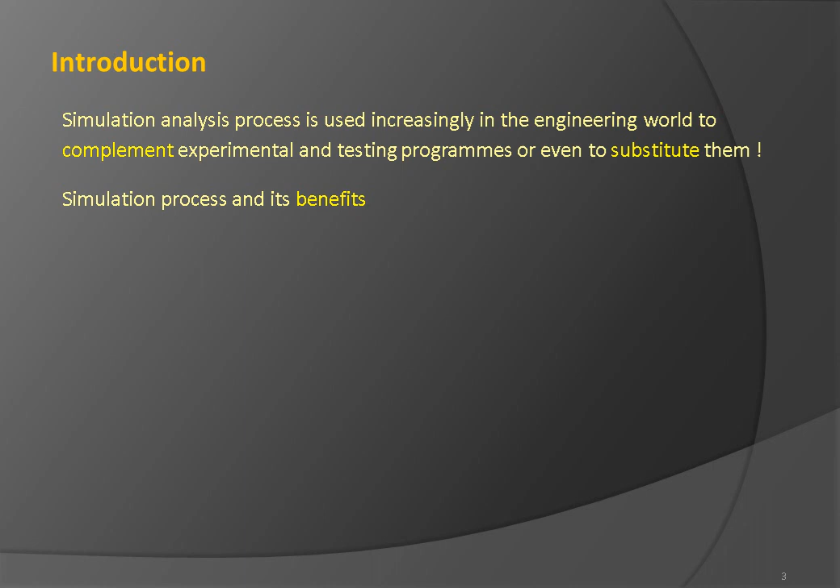It is worth starting the presentation with the following statement. Simulation analysis process is used increasingly in engineering world to complement experimental and testing programs or even to substitute them. The reasons for this are economic, as the simulation techniques offer greater flexibility in managing testing environment, faster turnaround time, more comprehensive post-processing options, and lower costs.

In some cases, safety considerations make physical testing impractical altogether. Such cases can be found in fire engineering, nuclear safety, and space equipment design, to name just a few. Therefore, an overall trend in engineering process can be recognized. Design by experiment or by test is being substituted with design by simulation.

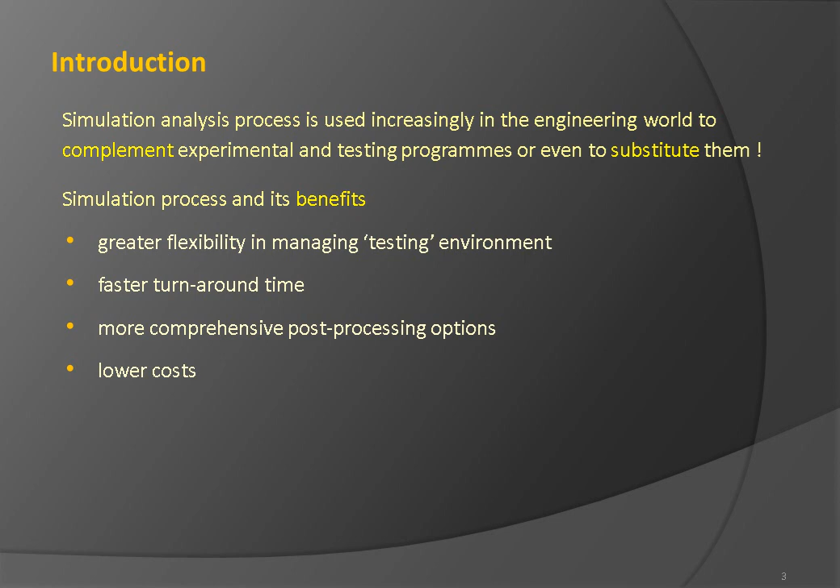In the world of numerical simulations, most of the effort is focused on recreating reality in a digital environment. Once the created virtual reality is representative of the analyzed environment, capturing relevant data is often much simpler than during physical testing. Initially, reality of interest has to be described using mathematical formalism. The question then arises, how well the mathematical abstraction corresponds to or confirms reality. Such a mathematical model has to be translated into a computer model that allows computational execution and simulation of defined real-world scenarios.

Verification activities are required to confirm that the computational implementation accurately represents the mathematical conceptual description. In addition, validation looks at the degree to which the computational model is an accurate representation of the real world from the perspective of the intended use of the model. These assessment activities shall be an integral part of the simulation quality assurance process. More on the subject will be said later.

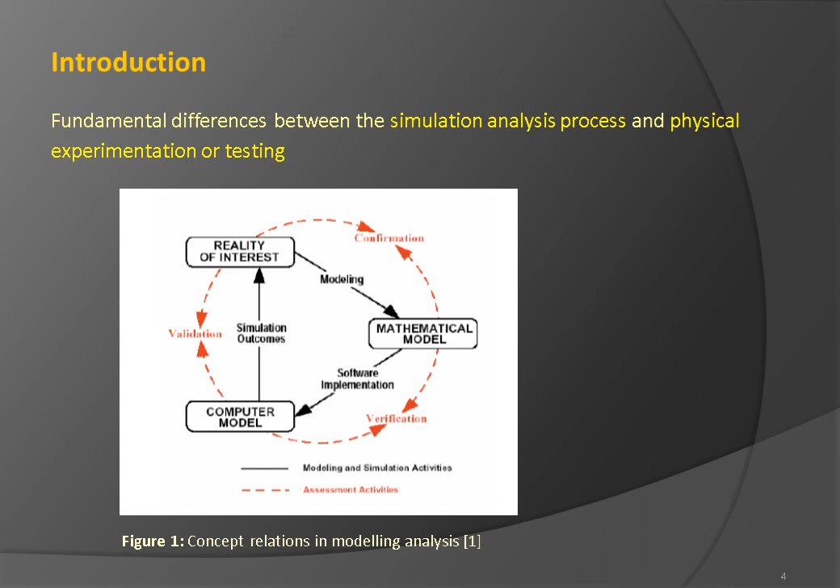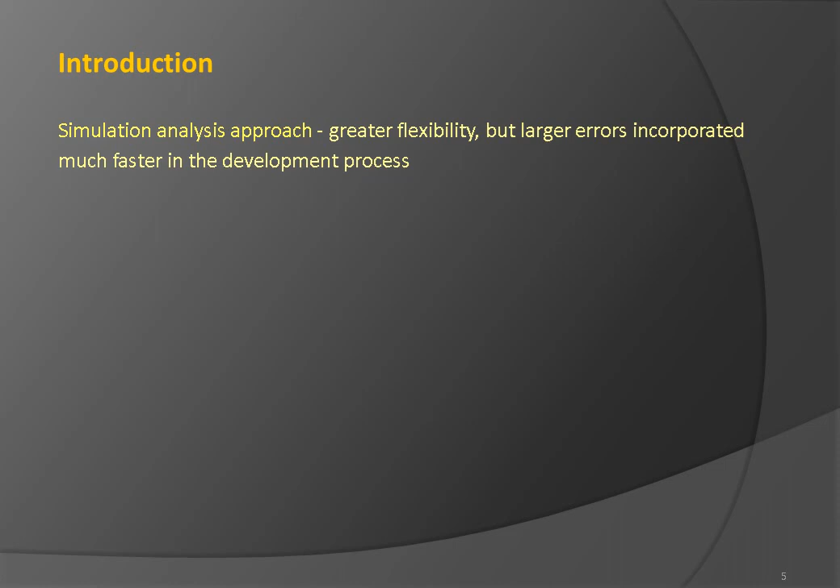Although the simulation analysis approach offers much greater flexibility, it also allows much larger errors to be incorporated in the development process much faster. To avoid mistakes and to mitigate their impact, as some of them will inevitably stay undetected, suitable quality assurance or QA processes need to be set up and implemented with full rigor.

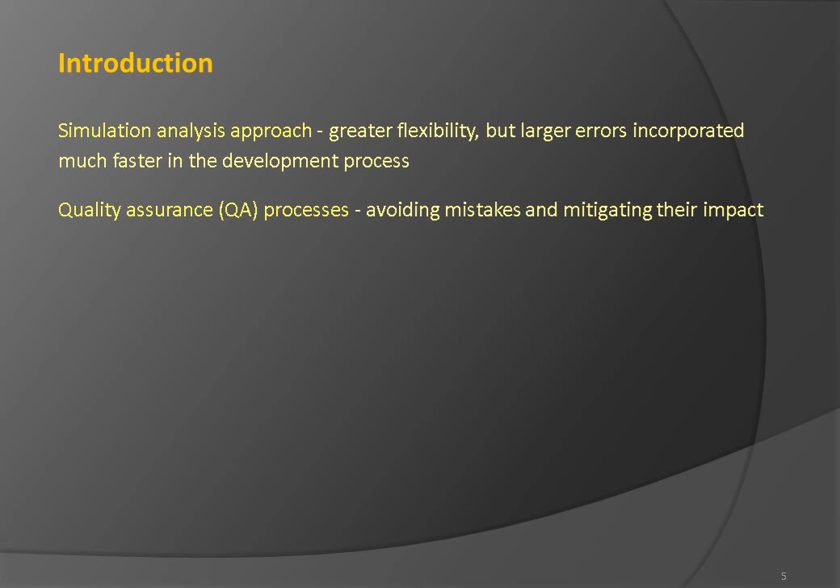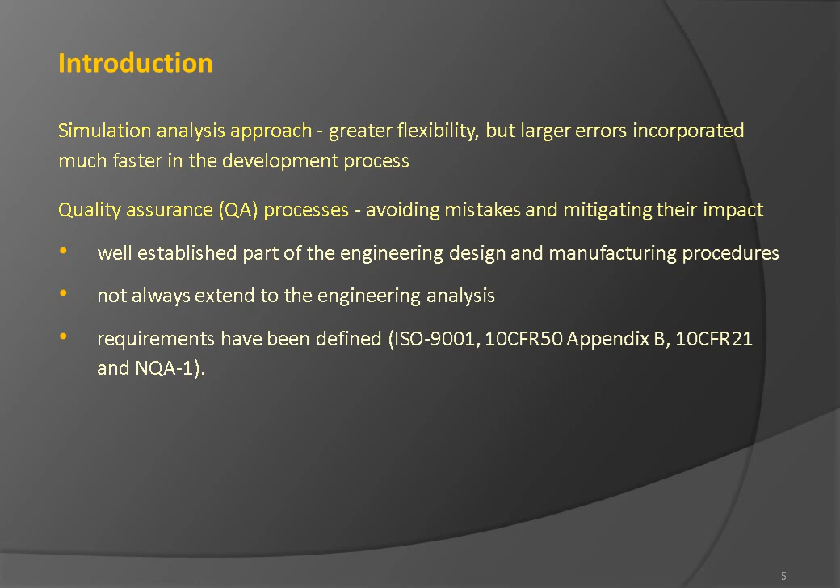Such QA processes are a well-established part of engineering design and manufacturing procedures, but they do not always extend to the engineering analysis, although the related requirements have been defined by ISO 9001, 10 CFR 50 Appendix B, 10 CFR 21, NQA-1, to name just a few.

It is important to emphasize that through all phases of the project work, the analysis objectives must be clearly defined and then agreed between all stakeholders. Such definitions shall be qualitative and quantitative as much as possible. This is especially true for the analysis output, its content as well as its form. It is recommended that clear separation between the design process and the analysis objectives is established.

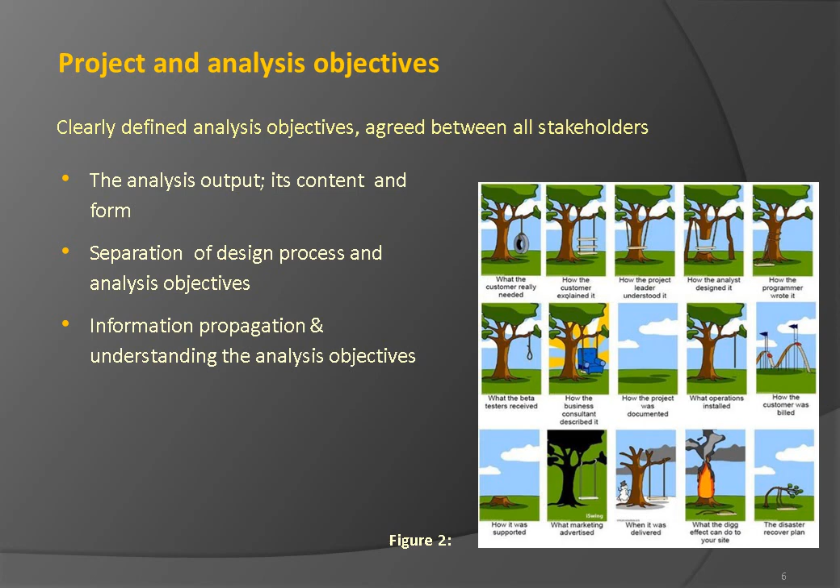The analysis objectives have to be propagated from the top to the bottom. Each analyst or engineer has to understand the objectives, that is, what has been sold to the client. On the right is a cartoon that too often illustrates my experience. Quality parameters, that is, modeling uncertainty, numerical errors, results variability, and sensitivity, shall be an integral part of the analysis objectives.

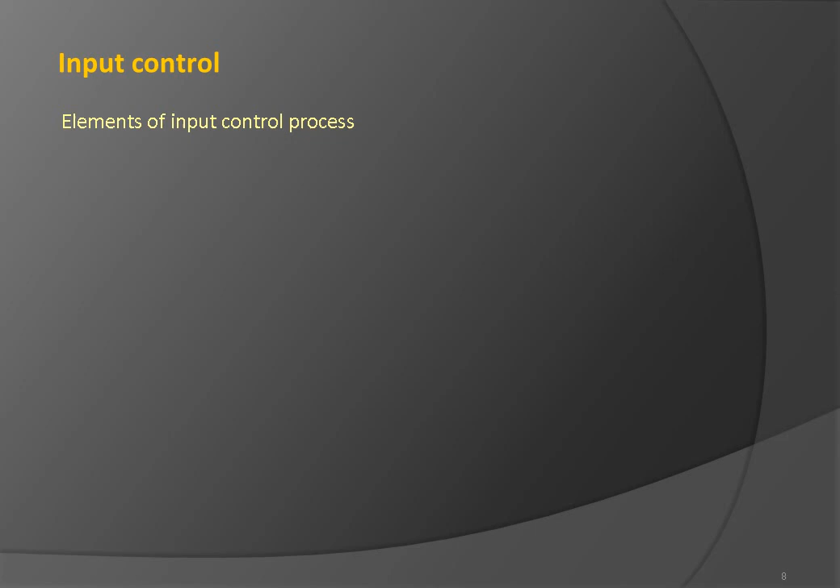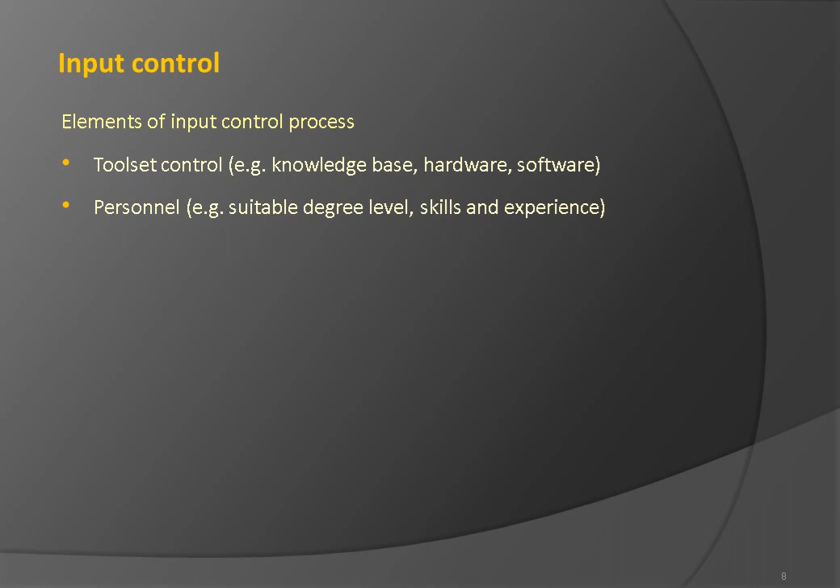To have any control over quality of the analysis output, we need to first look at the input control process. This consists of toolset control, that is, knowledge base, hardware and software; personnel, which have to be of suitable degree level, skills and experience; analysis and quality control procedures, either for lumped parameter modeling, CFD or structural or finite element analysis; project specification and requirements.

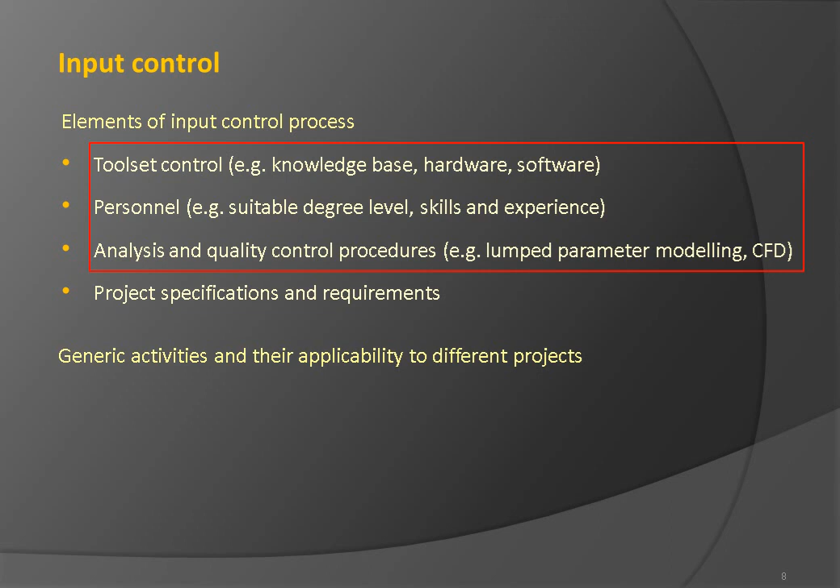Although these may represent a starting point of any project, they are often incomplete and subject to changes as the project progresses. Most of these activities are generic and applicable to different projects. They are time-consuming and therefore have to be accomplished prior to startup of analysis tasks. Validation and verification of declared software capabilities is an integral part of the input QA control. It can be and usually is shared with software vendors.

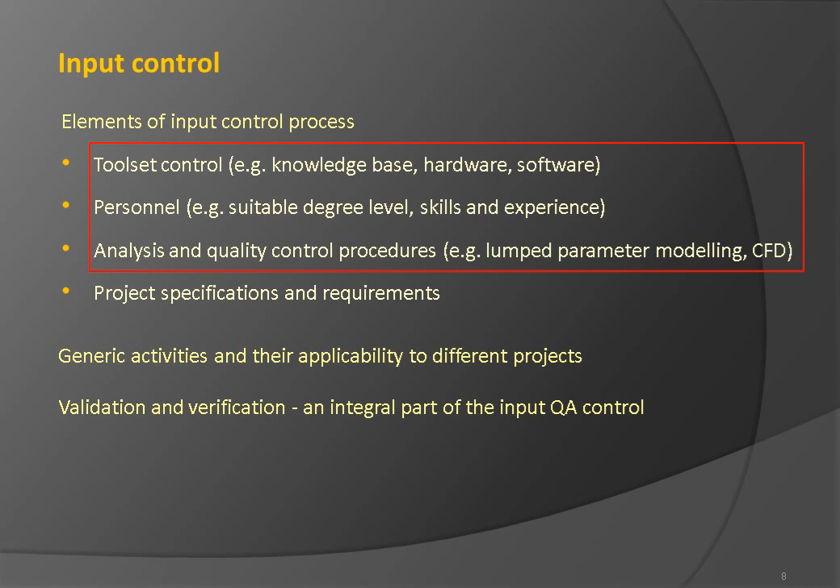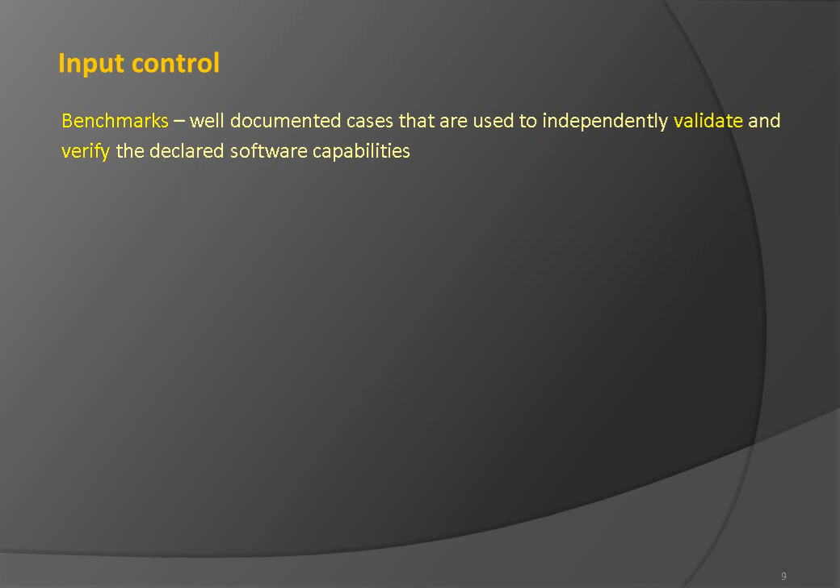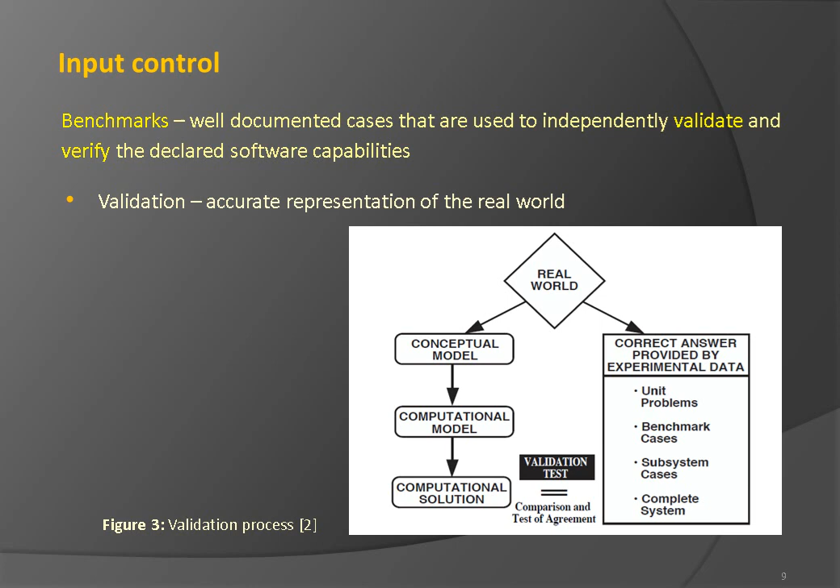Let's look a little bit closer at validation and verification. Benchmarks are well-documented cases with understood physics for which highly accurate predictions do exist. They are used to independently validate and verify the declared software capabilities. Validation is the process of determining the degree to which a model is an accurate representation of the real world from the perspective of the intended use of the model. For that reason, computational results are usually compared with experimental data, although analytical and alternative simulation results are also often used.

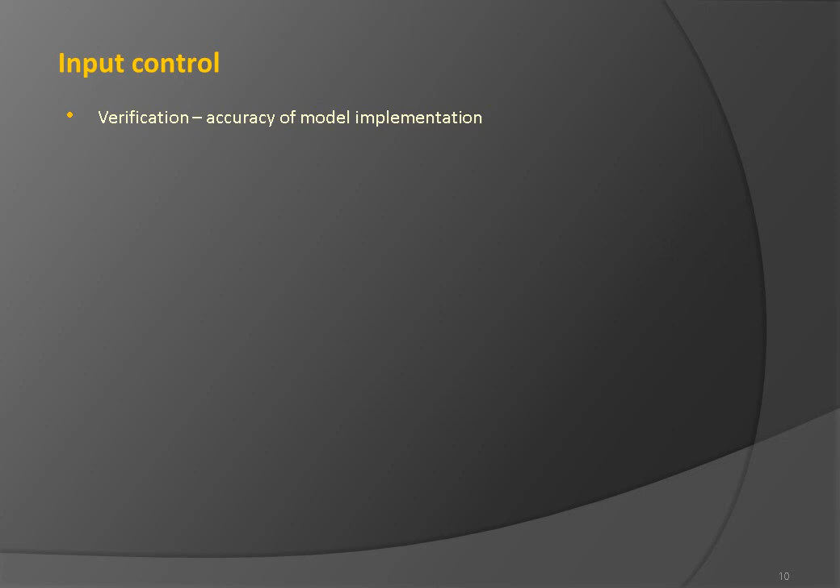Verification is the process of determining that a model implementation accurately represents the developer conceptual description of the model and the solution to the model. To detect and quantify errors associated, for example, with numerical diffusion and dispersion, the computational results are compared with analytical derivations or with benchmark solutions that were obtained with higher order methods.

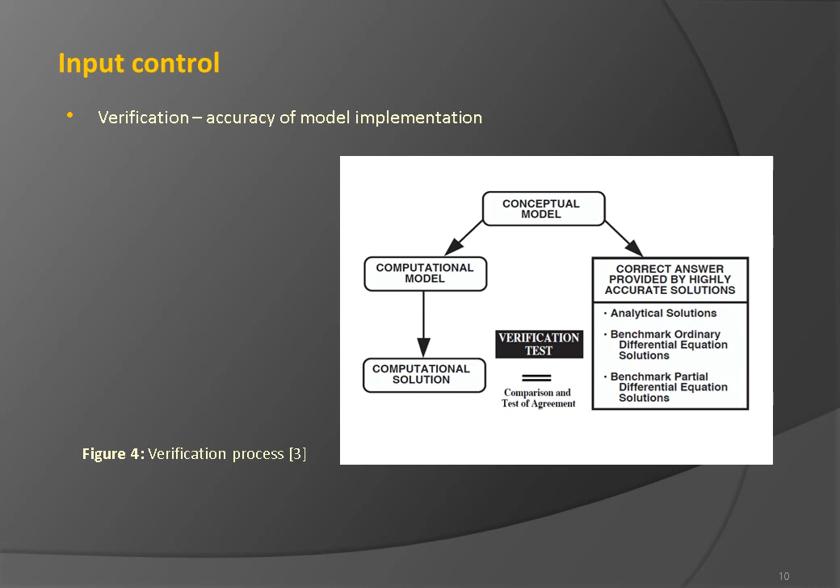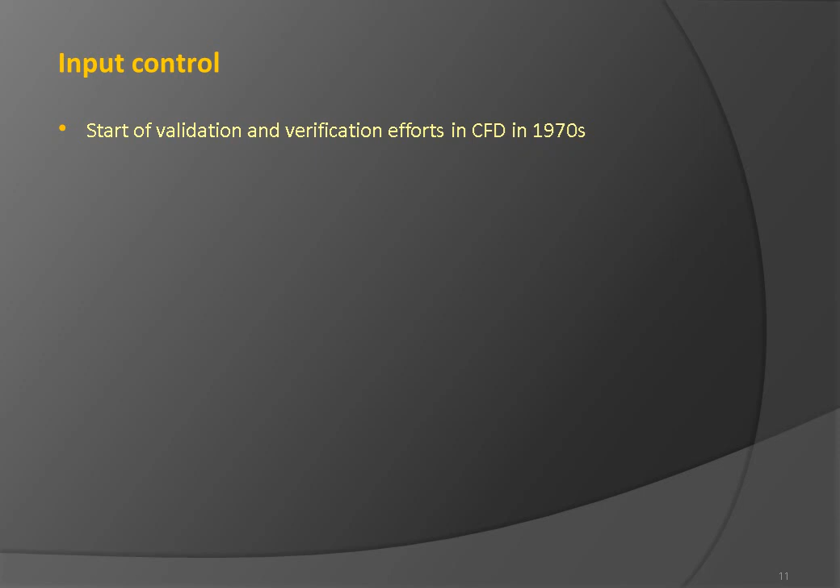The CFD community started to look into validation and verification problems some time ago. First papers appeared in the 1970s. At present, the discipline is well defined, and the methodology and associated terminology have been accepted.

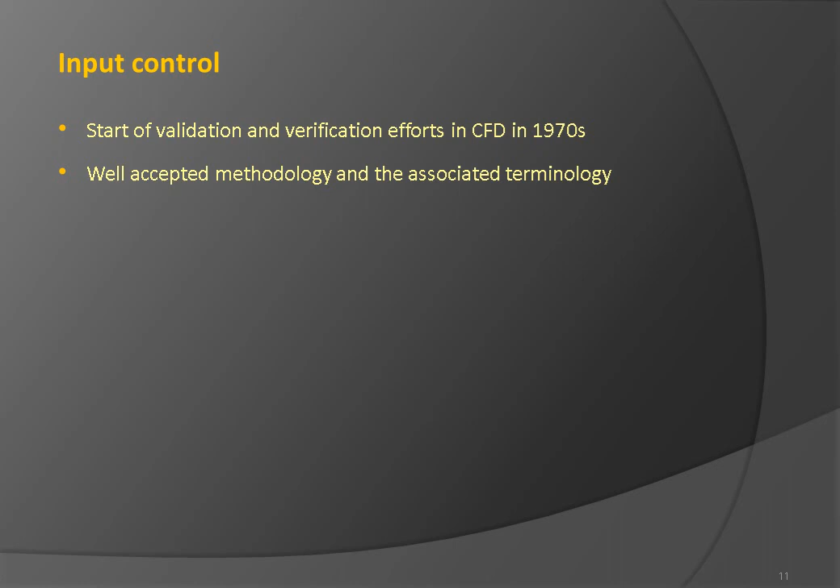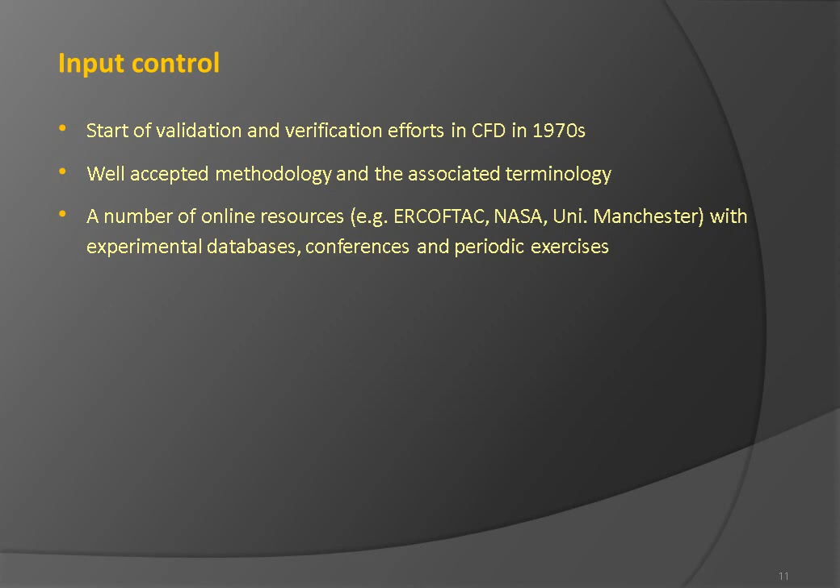A number of online resources hosted by ERCOFTAC, NASA, and the University of Manchester, for example, are available specifically for validation of software tools. They offer experimental databases, conferences, and periodic exercises. Nevertheless, the available pool of experimental data is strongly focused on turbulence modeling problems.

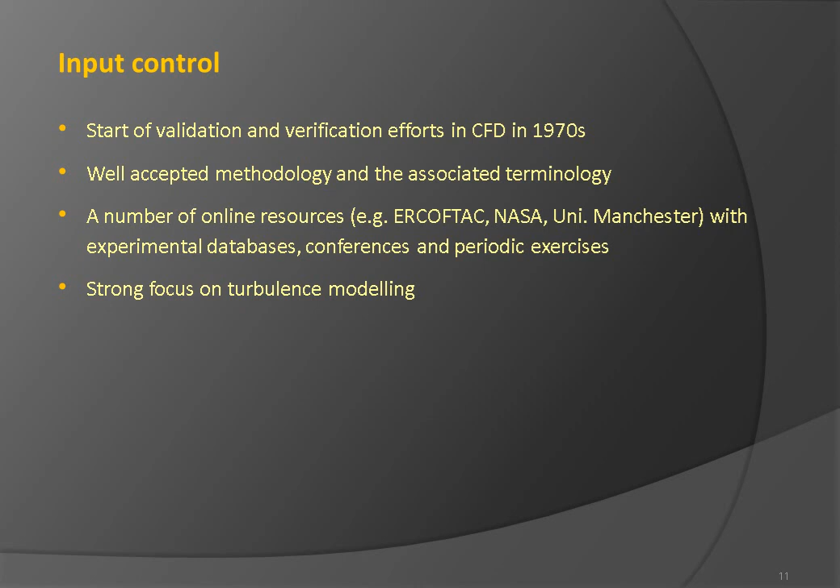Today, the modeling problems may include turbulence, multiphase flows, combustion, structural mechanics, electromagnetics, etc. As the modeling is becoming increasingly complex and coupled, the supporting experimental data and theoretical investigations are simply missing.

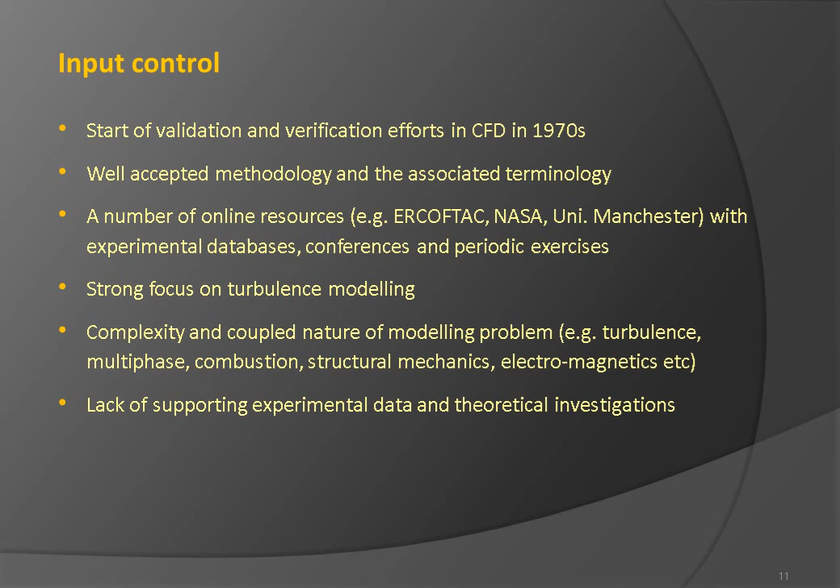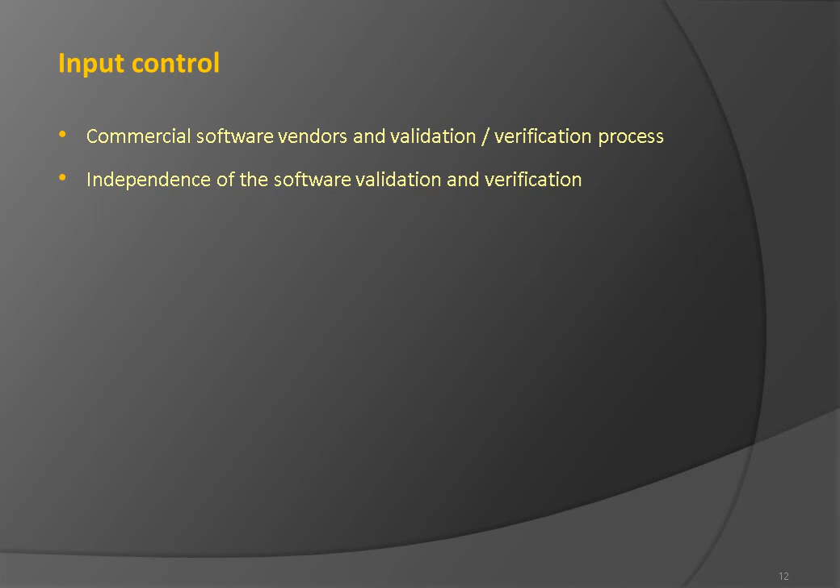Commercial software vendors may assist in the validation and verification process, but they should not be its primary source. It is important to assure independence of the software validation and verification, and that means performing in-house testing. Such tests inevitably also include the software user, that is, analysts, and not only the software itself.

Although much of these activities can be performed independently from day-to-day activities, a certain degree of modeling, analysis, and prototyping will always be required on an individual project basis.

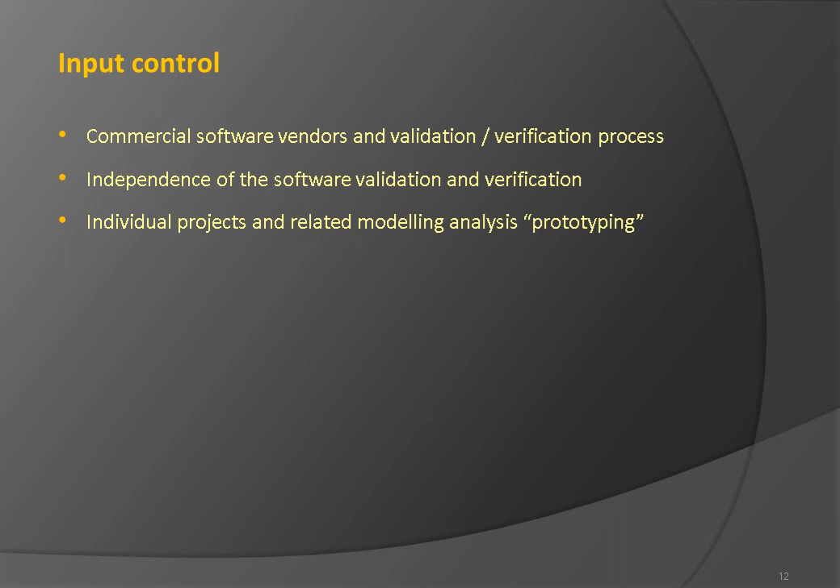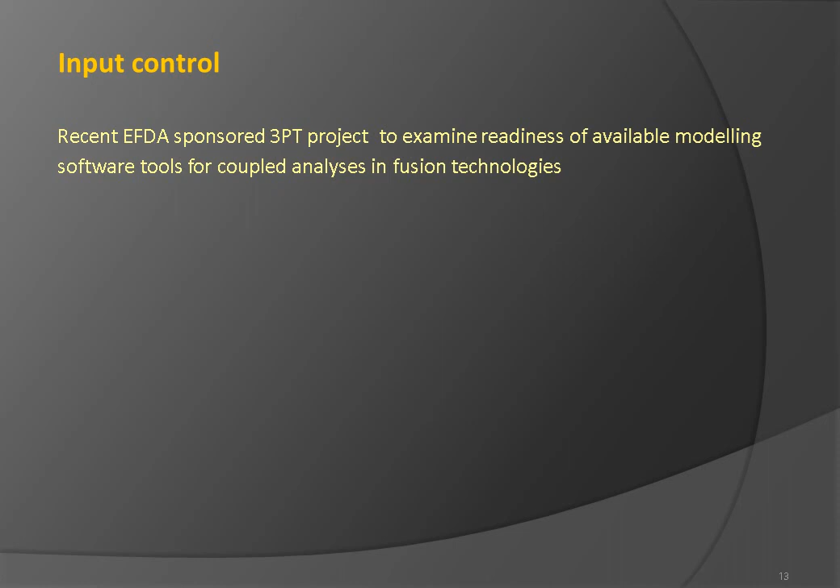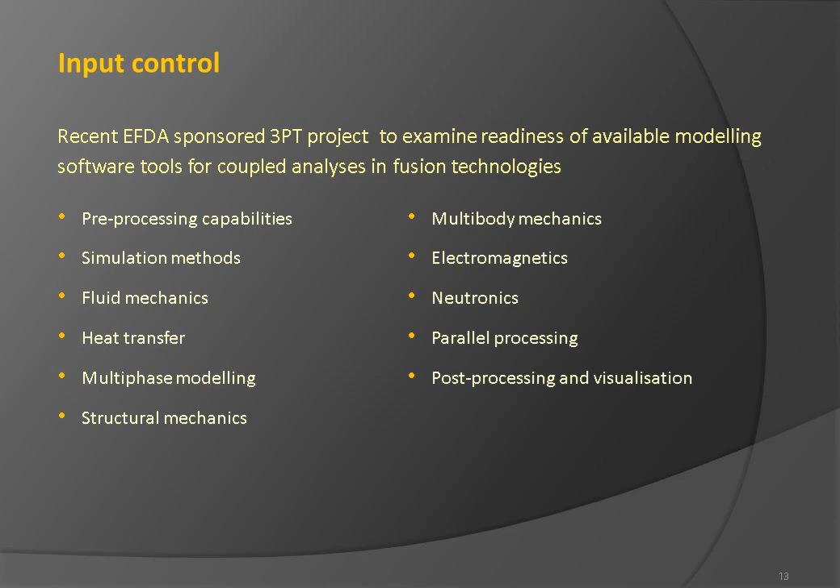A recent EFDA-sponsored 3PT project examined the readiness of available modeling software tools for coupled analysis in fusion technologies, taking into account pre-processing capabilities, simulation methods, fluid mechanics, heat transfer, multi-phase modeling, structural mechanics, multi-body mechanics, electromagnetics, neutronics, parallel processing, post-processing, and visualization. A number of benchmark cases have been defined covering some of the relevant analysis areas.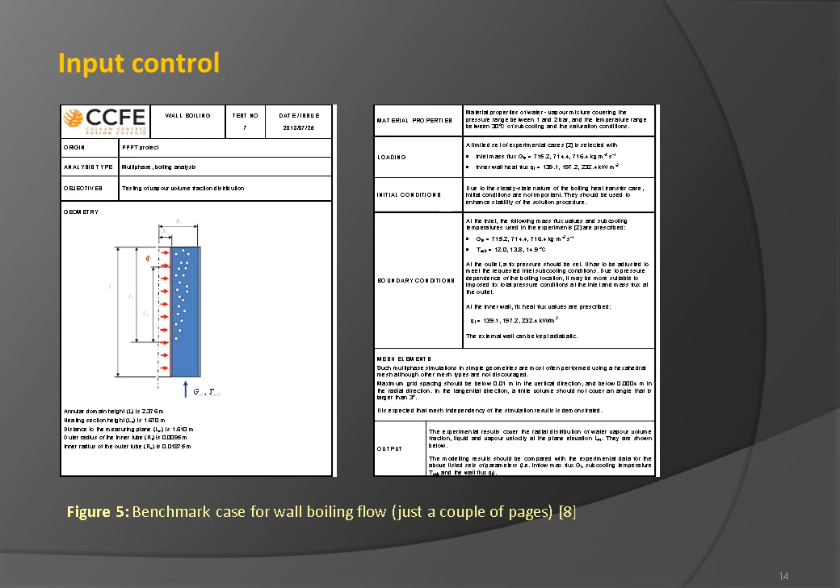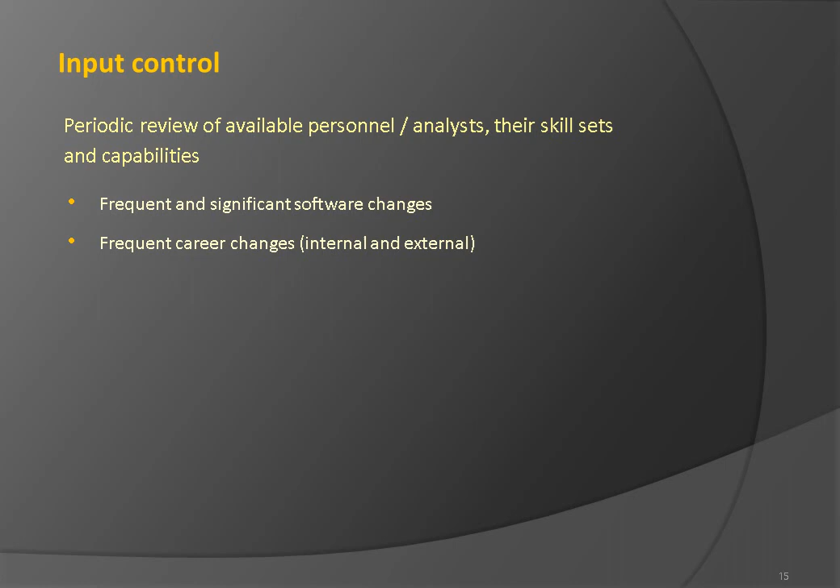Input control also includes a periodic review of available personnel, their skill sets and capabilities. These problems should not be underestimated. They are often related to frequent and significant software changes, which nowadays can occur on an annual basis, and frequent career changes, either internal or external. People move from position to position, and this needs to be taken into account.

In most cases, a suitable analysis process has to be identified prior to the start of the project. This means that the commercial, design, and analysis teams need to work together in preparation of the analysis specifications. Key performance indicators need to be defined. They can be commercial, such as hourly rate, desired profit level; technical, such as method implementation, results accuracy, etc.

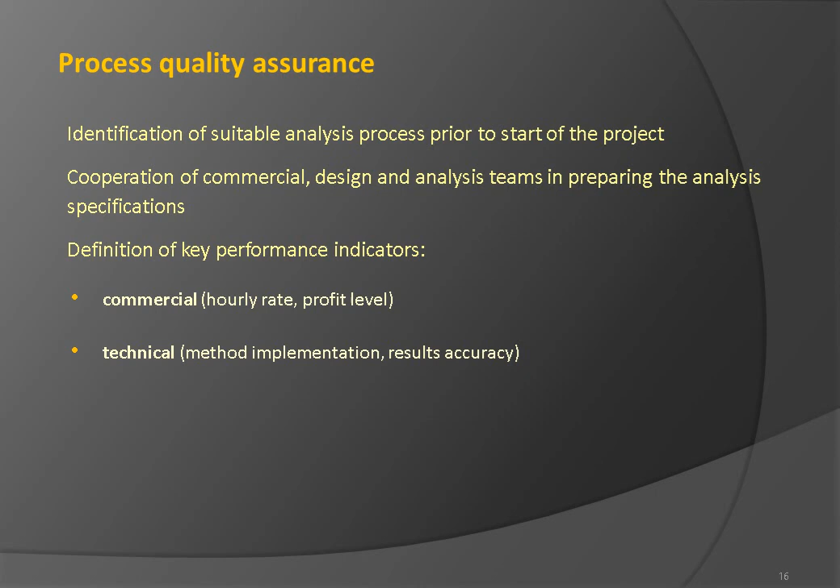Scientific, for example, we would like to develop a novel approach. And last but not least, the level of client satisfaction.

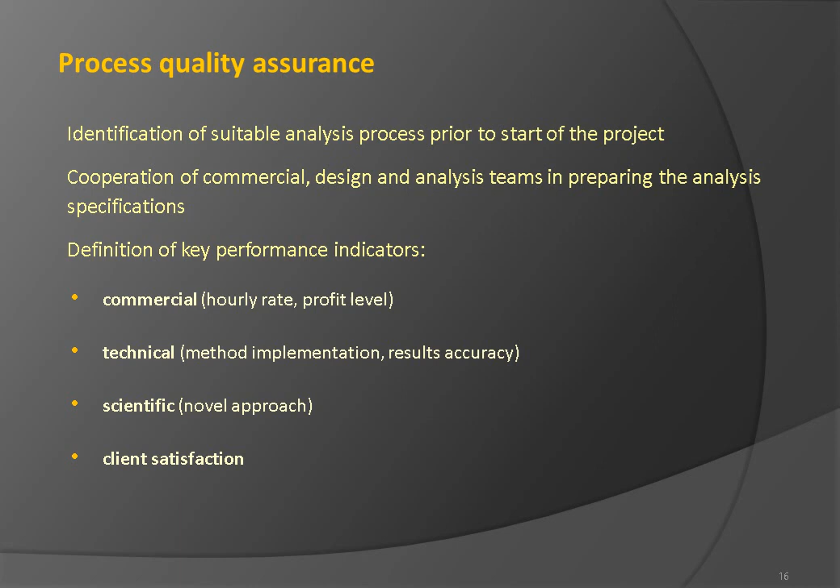The analysis process plan needs to be as simple as possible to allow for feedback as the work progresses. Below is a typical Gantt chart for a CFD analysis. As we can see, most of the tasks are consecutive. Nevertheless, long simulation times may allow for parallel preparation, execution, and post-processing of multiple cases.

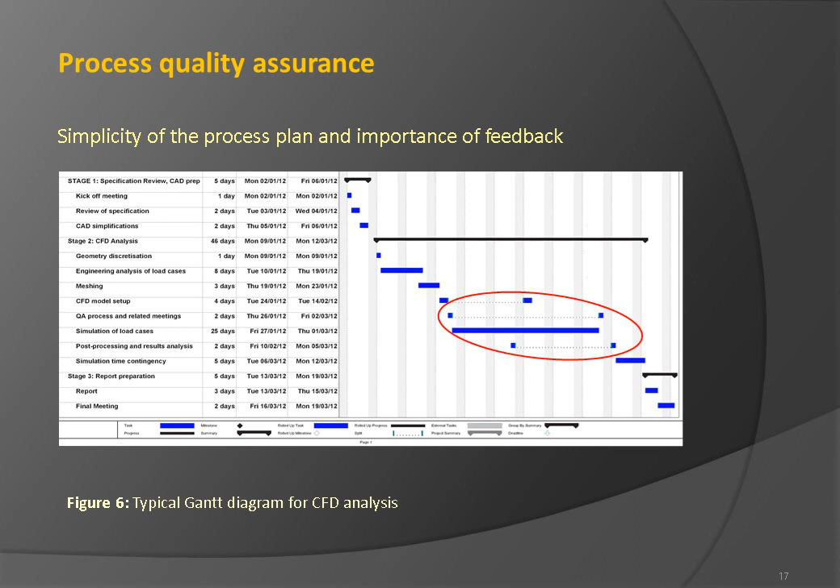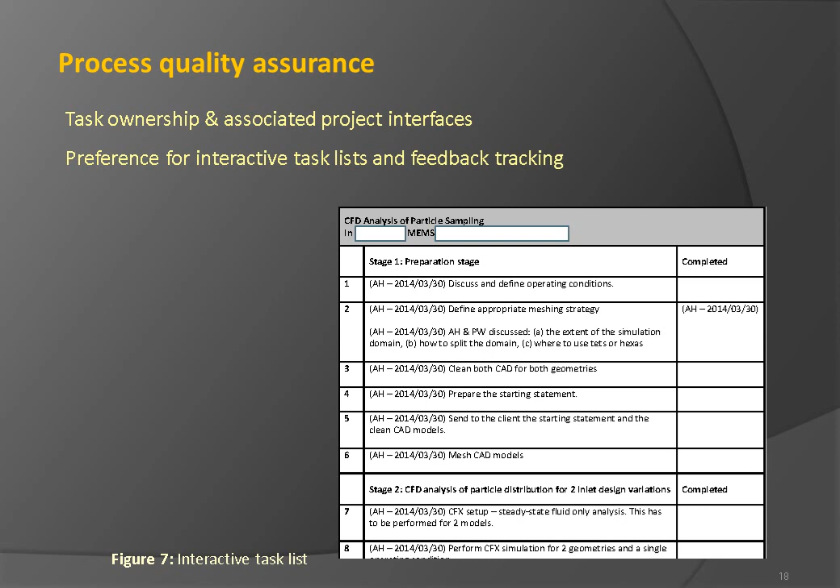It is crucial that task ownership is established. This means that associated project interfaces need to be agreed between different project groups and then set up and respected. My personal preference are project task lists that can be set up in Excel or online and allow instant feedback from project participants.

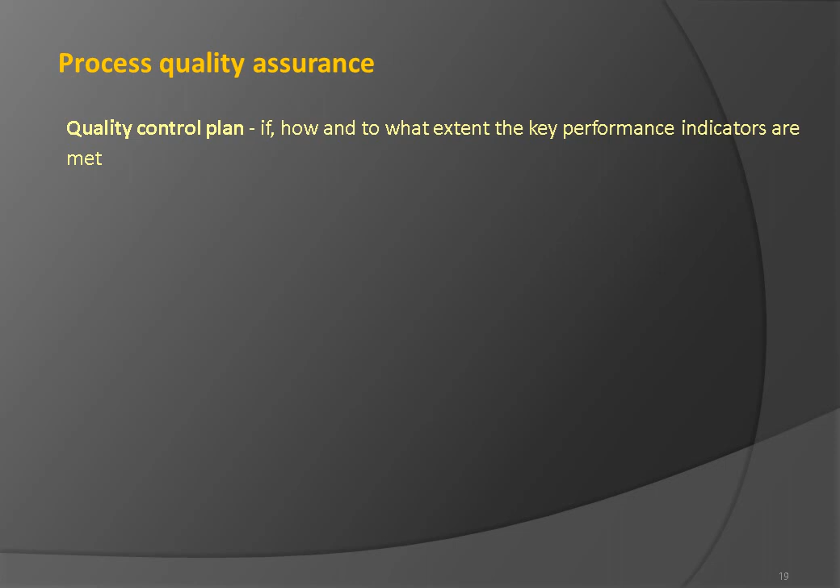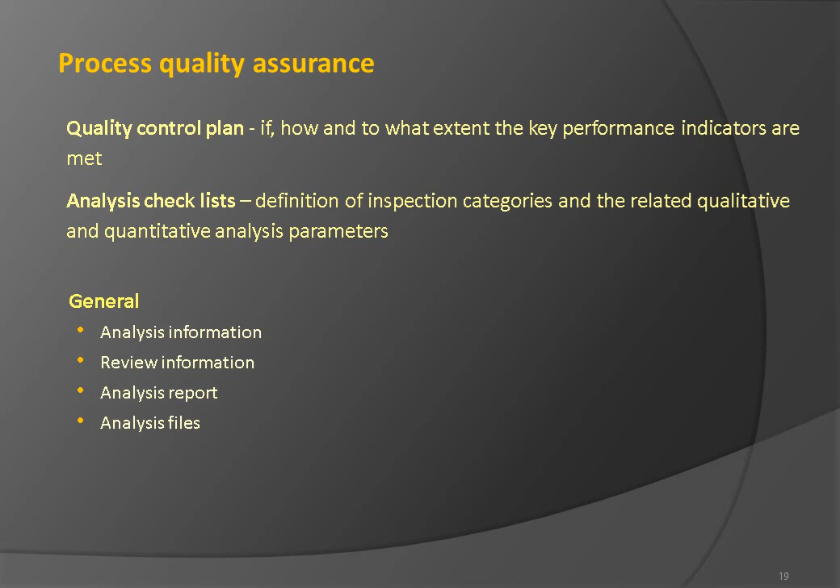It comprises a general section with the basic analysis information, a CFD analysis section that controls analysis processes such as geometry creation, meshing, model selection, their validation and analysis results, then the reporting section, and at the end, different notes and recommendations.

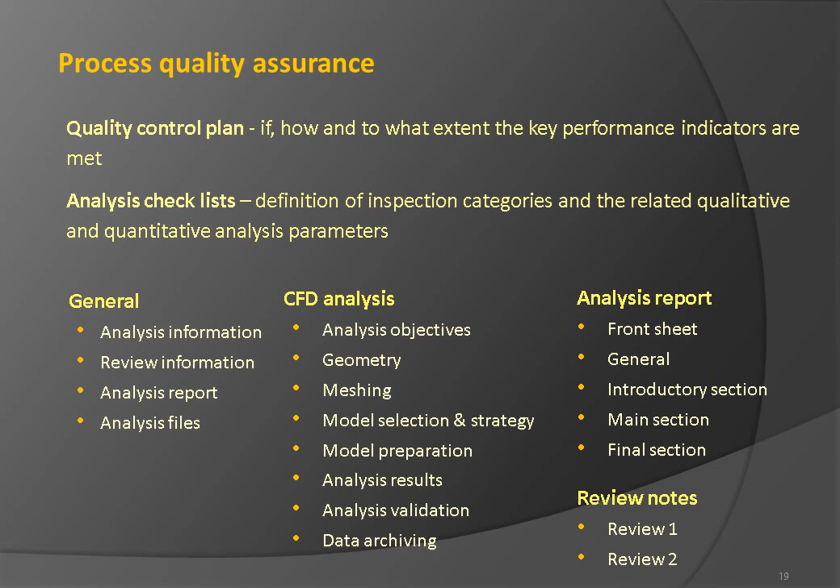Quality control plan tracks all phases of the project execution. It helps in recording evolution of quality concerns and eventual resolution of the captured problems. It is important to emphasize that the quality control plan needs to be a living document.

After completion, it is good practice to perform a project performance review. It will help improve efficiency and quality, including accuracy, of the overall analysis process. Its findings have to be fed back to update the analysis processes and the corresponding quality plans.

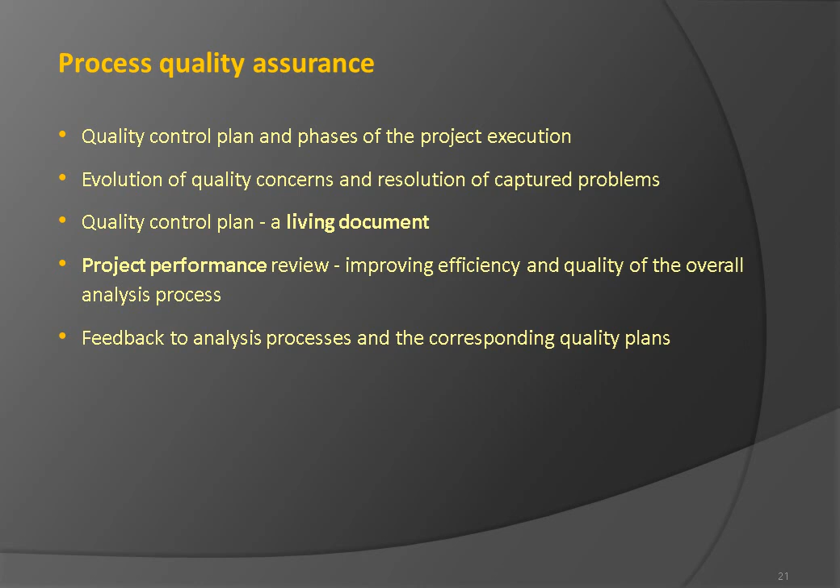At the end, I would like to summarize key points of the presentation and to stress the importance of communication with the client.

Principles of the quality assurance process applied to engineering analysis do not only improve the quality of the output, that is, higher results accuracy, less variability, better repeatability, etc., but they also reduce commercial risks associated with the project complexity.

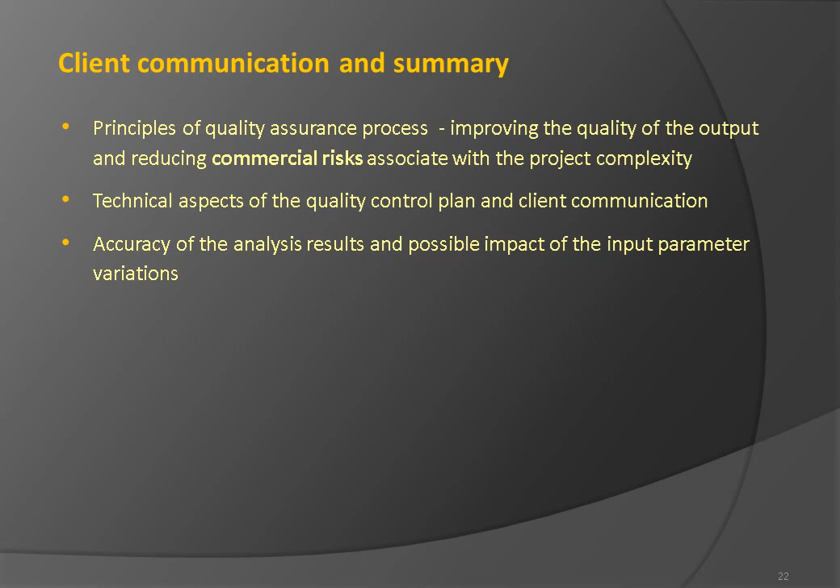Technical aspects of the quality control plan need to be communicated to the client, which can be either external or internal. It is important that the client understands the accuracy of the analysis results and possible impact of the input parameter variations.

Overstating the accuracy of the analysis results may have serious consequences. The results uncertainty, or at least its estimate, has to be an integral part of project deliverables.

Although available computational resources may allow a more detailed picture of physics, they should not become a substitute for analysis accuracy and to cover for results variability.